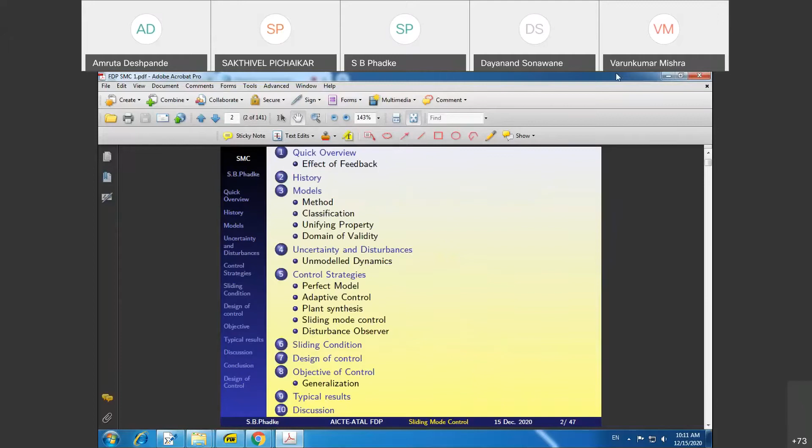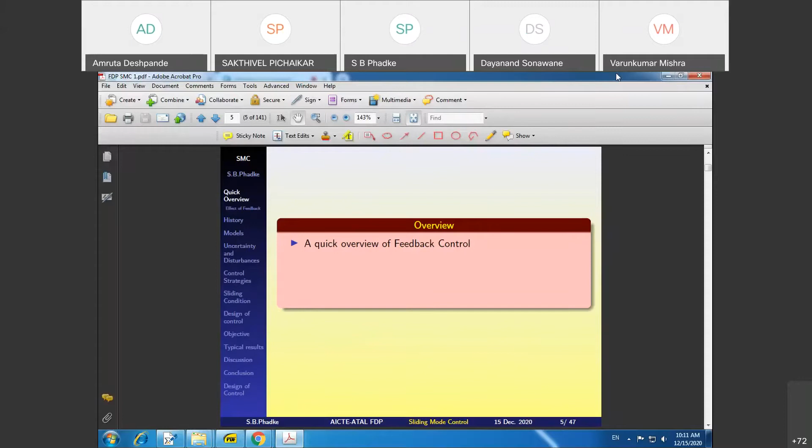Very good, audible. I'll be talking on sliding mode control. And before we go over to sliding mode control, a quick overview of basic ideas in control is what I will start with.

Whenever we talk about feedback control or systems, modeling issues come into picture, along with modeling and their limitations. Modeling is always imperfect, and therefore what limitations are there for modeling, that also we'll discuss.

I'm getting an echo. That might be somewhat nagging to others as well. A big echo is coming. Is it okay with everyone? Hello, request to all participants to please mute your mic.

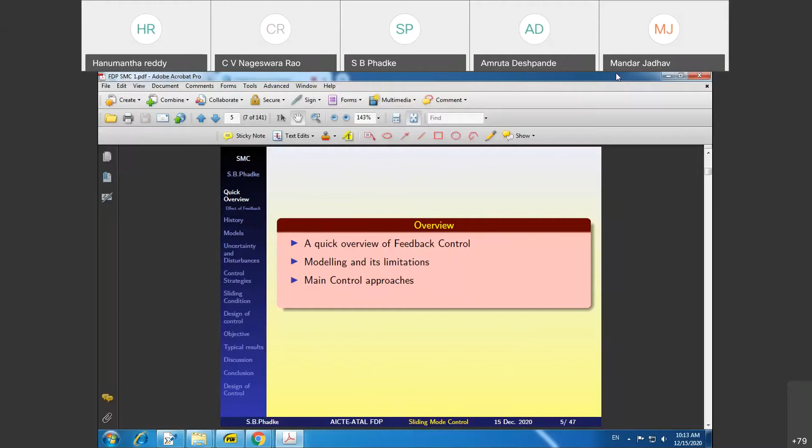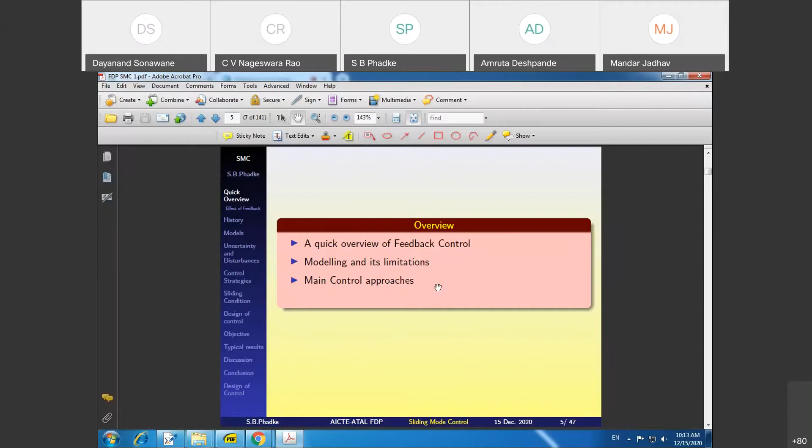So the main control approaches we would like to briefly touch upon and then come over to sliding mode control. Although most of you have already done feedback control and these things are not new to you, I would like to give a basic idea for those who may be altogether new to feedback control, and that also develops a continuity for the discussion.

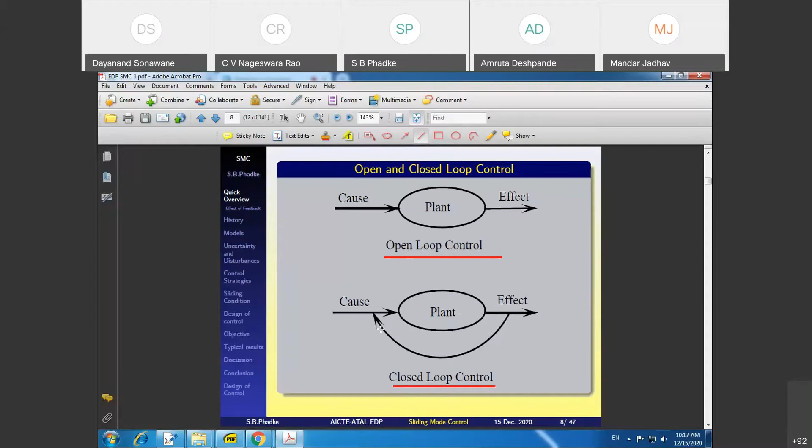So in the first system, the effect depends on cause, but in the second system, cause and effect are interdependent. So that's the idea of closed loop control - cause and effect are interdependent. And this situation can be viewed slightly differently in this way.

A closed loop system, where a cause produces an effect and that effect in turn can alter the cause, is equivalent to two systems - we can look at them in either way. Feedback modifies the cause, as we can see here, because of the feedback from the effect it modifies the cause, acts on the same plant, and produces a desired effect. On the other hand, one can look at the whole thing as feedback modifying the plant rather than modifying the cause. As we see, when we take proportional derivative feedback, the plant itself is modified in a certain sense. So it's a matter of choice, a choice between how you look at the feedback control system. Either way, one can take a look at the feedback property.

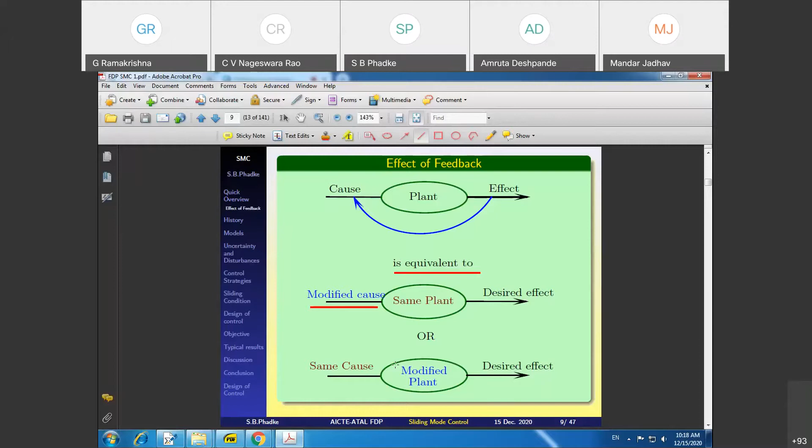The feedback essentially gives us freedom from having to know a lot about the system that we want to control.

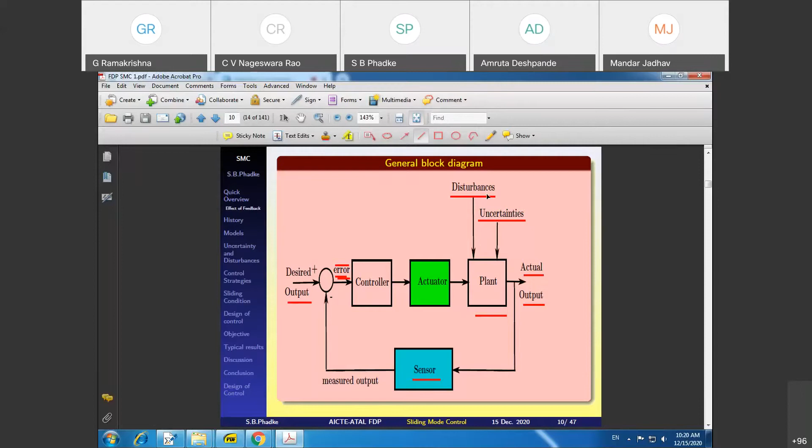Now, this would all have been very simple had it not been for these two players - a disturbance, or disturbances, which are unknown, external, and unmeasurable - we cannot measure them. And uncertainties, that is our ignorance about the plant dynamics, plant's mathematical or otherwise whatever description it has. So it is our ignorance about the plant that is represented by uncertainties. And these two players make the job of feedback control difficult.

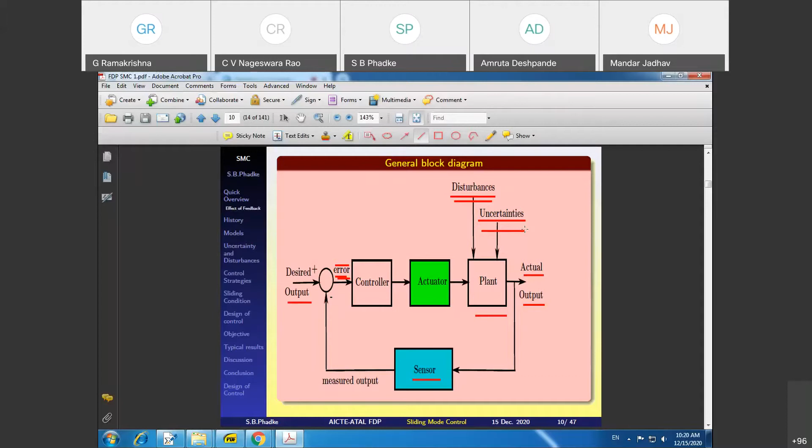The basic classical feedback does make the plant relatively less sensitive to disturbances and uncertainties. But depending upon the plant and its application, that may not be enough. And that is why we'll be considering some control strategies, particularly sliding mode control.

Whatever we discussed just now can be considered to be an interplay between modeling, which represents whatever we know - whatever we know is put in terms of a model. What we do not know is called the uncertainty. Uncertainty may be large, it may be small, or whatever. By uncertainty, I also include disturbances in this - so this is actually uncertainty plus disturbances. And what we have in our hand, that is called the control. There is an interplay between control and modeling and uncertainty, and control and uncertainty.

It might look odd as to how control can change modeling, but depending upon certain control actions that we intend to take, the model may be enough, adequate, or not adequate. A simple example, which we all know, is if we take a large control action, then the actuator may saturate. And in our model of the actuator, if we have not considered its saturation, that model does not remain adequate. So there is an interplay between control, modeling, and uncertainty in a feedback control system.

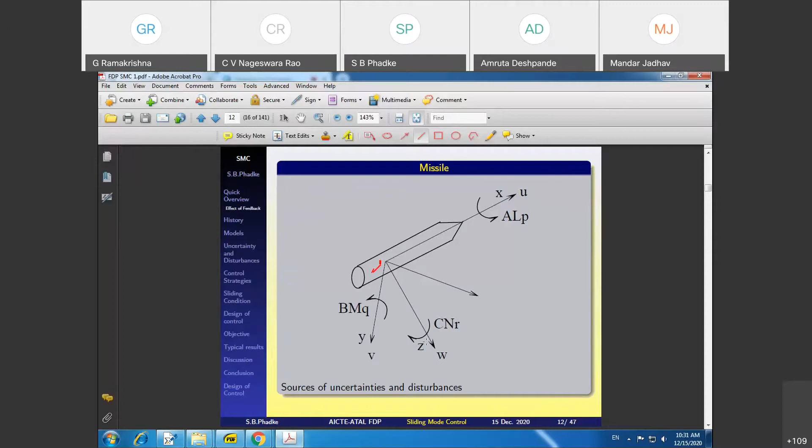There can be control surfaces on the missile which are moved, and they cause a change in the acceleration of the missile. So we have got control in our hand. Uncertainties and disturbances are something that we do not have any control over. By writing the equations of the missile, the suspension system, or this engagement geometry, we try to get a model as accurate as possible, but never really accurate enough. So that's how it is.

A bit of history about how people developed control algorithms or control laws in the beginning. As we all know, the steam engine governor, first invented by James Watt, was one of the earliest applications of feedback. Some applications before that were also reported, but we'll not go into that. So, steam engine governor was first proposed by James Watt in 1788. The basic principle was so good that even in today's steam engine governors, we find some ideas of this early steam engine governor.

Now, when the steam engine governor was invented by James Watt, he did it absolutely by intuition. That means he did not use any model at all. So, no question of talking about uncertainties in the model. The steam engine governor produced by Watt worked fantastically in the beginning, and people were very happy until sometime later when the governor developed unstable operating conditions under some environments. People were thinking as to why the governor is becoming unstable, but could not find any reason by just the physical analysis of the system.

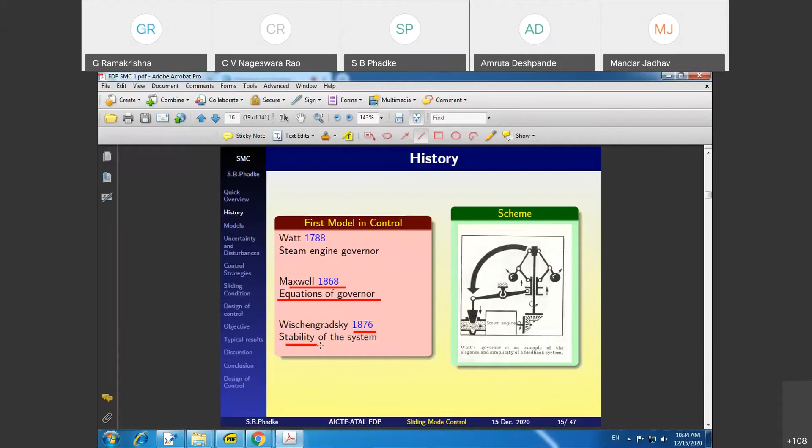That's okay. This situation continued for quite some time, as we'll talk about that later. But the modeling, which is of very great importance to us because we start with model based control and we land up with the difficulty that models are having error, models are not accurate, and therefore what control strategy.

Hello, any question? Does anyone have a question? I'm not getting that question. Maybe sir, it's a noise. Okay. Right. Sir, I am unable to mute that person. Okay, now.

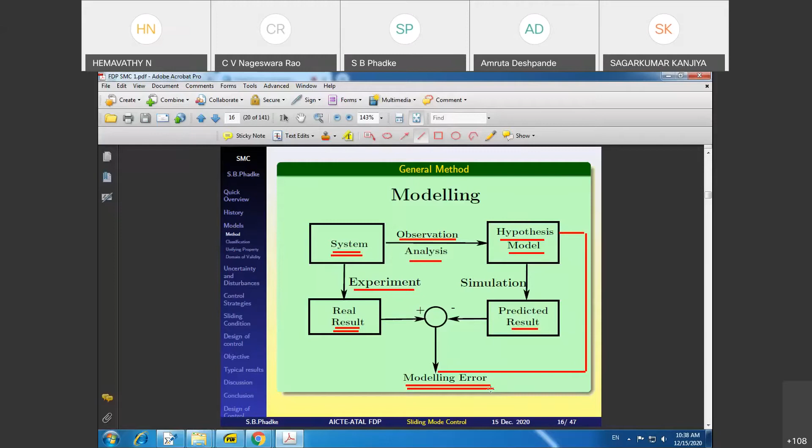The models that have been developed can be classified as analogy models, and many examples are already known to us. The scripts of Chinese and Japanese, which are pictographs, where what we intend looks similar to the script for it. Sun might look like a sun, a moon might look like moon or mountain, etc.

More useful models which have the analogy principle are the scaled down models of ships, aircrafts, dams, riverbeds. CWPRS that we have in Pune, close to Khadakwasla, does some such work on riverbeds and dams by building scaled down versions of those real systems. So that is one way.

In fact, I got some examples of that. The Taj Mahal that we see in presentation shops, gift articles, they are actually scaled down versions of the real Taj. So that's an analogy model.

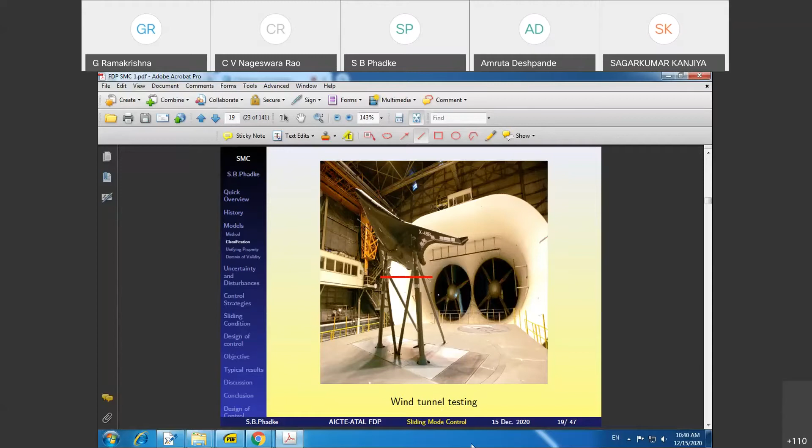A wind tunnel that is used for testing of aircrafts, missiles, and hydrodynamic tanks for testing ships and torpedoes, etc. There are systems like this where the object to be tested, an aircraft, is actually a scaled down version of that aircraft, something like a toy. Instead of flying the real aircraft, what they do is fly air around that object using turbines which produce that air, and a small experiment of that type was done at the Institute of Armament Technology where I was working.

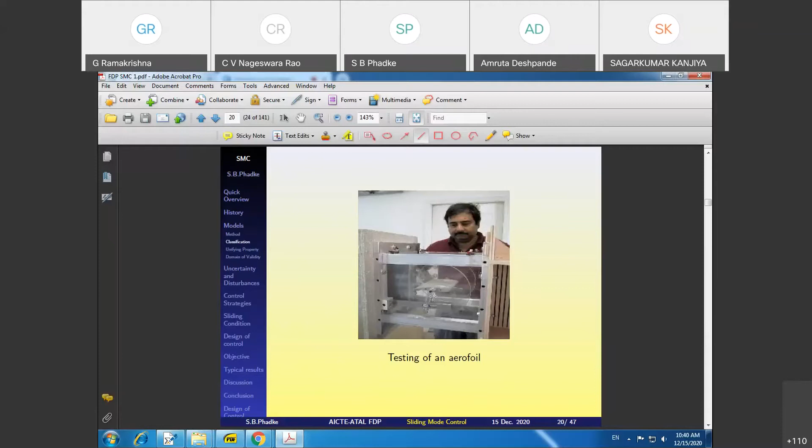Here you see that there is an aerofoil here and the air will be coming from this side. Air is coming from left to right on the screen, and that is how the scaled down airfoil works. The airfoil is actually a control surface on a missile that is being tested. So these are all analogy models that are very useful and are used even today.

But in earlier days, the importance of analogy models was not really understood. In fact, while we were talking about the model of the steam engine governor, somewhere around that, after Maxwell wrote those equations in 1868, in 1875 the British Navy launched a ship called Captain, and it was launched with great fanfare. One British engineer was unhappy.

His name was William Reed, and he had performed experiments with a scaled down version of that ship and concluded that the ship will overturn even in mildly rough seas. Unfortunately, no one paid any attention to what he was saying because his scaled down version of the ship looked like a big toy. They said that he has made experiments with a big toy, nothing else. As ill luck would have it, the ship did sink on its maiden voyage, and some 500 people perished.

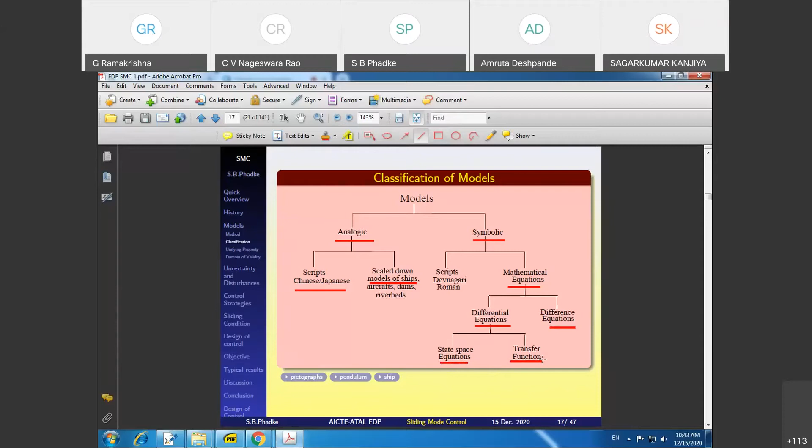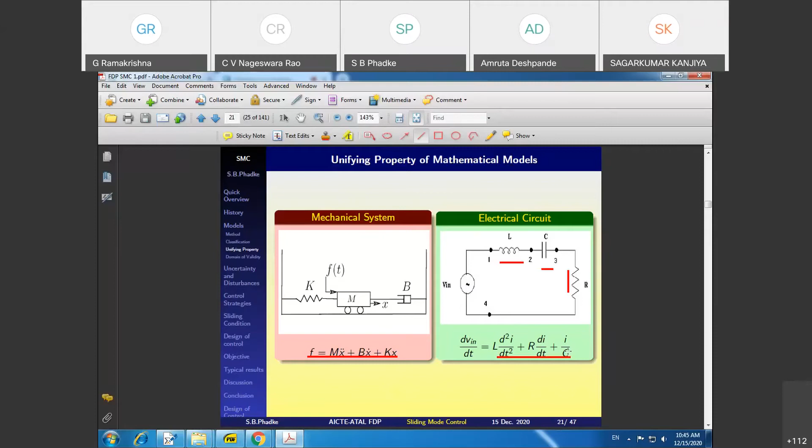But when we write differential equations for these systems, we find that the differential equation that governs a mechanical system like this is a second order differential equation with fairly constant coefficients: mass, damping coefficient, and spring stiffness. The electrical system is also a second order differential equation with inductance, resistance, and capacitance fairly remaining constant for a small duration of operation. So if I can analyze a mathematical model, if I can analyze a second order differential equation, no matter what system I'm dealing with, I'll be able to make conclusions about their performance. So that is why this unifying property of mathematical models is a very important property.

Now, all models have a domain of validity. This is another reason why we talk about being able to control uncertain systems. That means even if I make a model and even if that model is good under certain conditions, the same may not hold good when the operating conditions change. For example, the spring.

We know that the spring force is proportional to the deflection, the Hooke's law for a spring. But if that deflection exceeds a certain value, then that law no longer holds good. Then it is called a hard spring or soft spring.

People in the audience with a mechanical background will agree that if the deflection exceeds a certain value, the linear model will not hold good. So once again, that interplay I'm coming back to: if you have a control law such that the spring deflection is kept within a certain value, then the model kx is good enough. Otherwise, your model needs to be changed.

So there is an interplay between control and model. Similarly, saturation, about which I have already talked, saturation of actuators, amplifiers, and whatnot. We have got saturation in most things. And flexible body effects in aeronautical objects such as missiles or aircraft. A small or short missile, maybe a shoulder fired anti-tank missile, can be considered a rigid body like this. But a long, thin missile will buckle under its own weight, especially in the beginning when the propellant is a very significant percentage of the overall mass, and then flexible body effects will come.

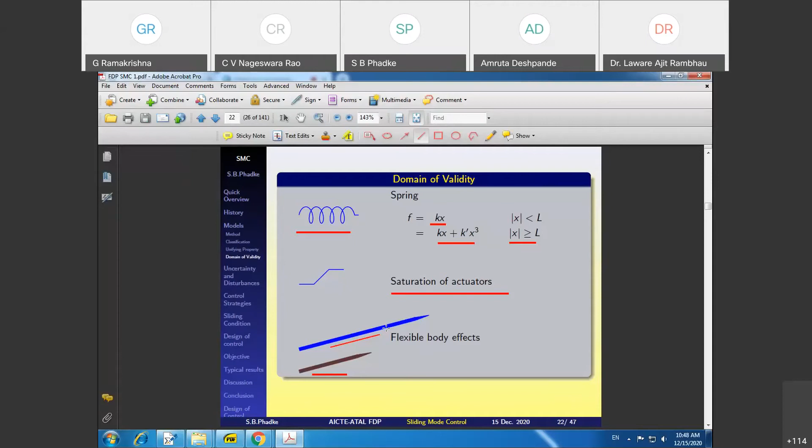Therefore, we formally now talk about the plant, because that is what we are interested in. Control is something we are going to design, and uncertainties and disturbances are the adversaries against which we design our control. So uncertainties in terms of parameter variations, unmeasurable disturbances, unmodeled dynamics. Sometimes dynamics are so fast we don't care to model them at all, an amplifier for example, which is also governed by a first order differential equation, but is so fast we ignore its transfer function. That differential equation can become important if you are ambitious in your control, so once again, the interplay between control and modeling.

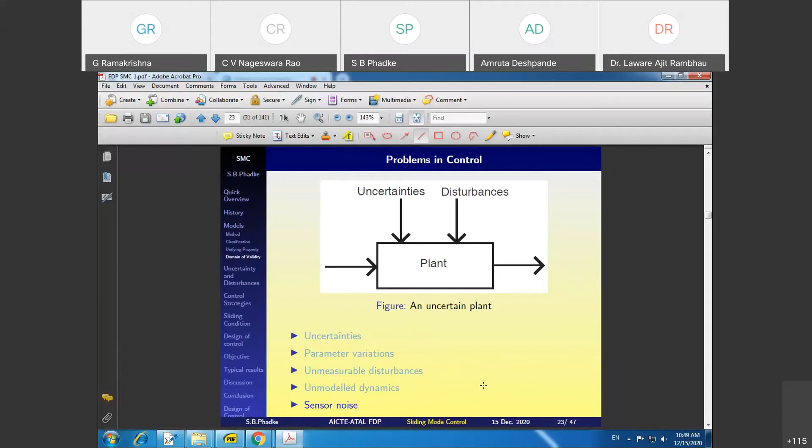Unmodeled dynamics, sensor noise, a hard question for the feedback control engineer, because he depends on what the sensor tells him about the status of the system. If the sensor does not give correct information, he is at a great loss. Sensor data is like the state that is known or observed by the system, and if that gets corrupted, your chances of controlling the system well will be rather difficult.

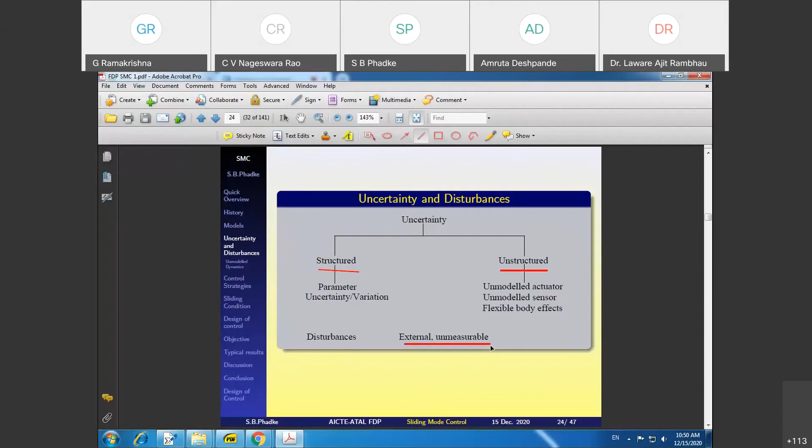So uncertainties are classified as structured, where you have parameter variations etc. but no additional dynamics, and unstructured, meaning some additional dynamics was ignored, like an unmodeled actuator, unmodeled sensor, or flexible body effects, as we discussed with the long thin missile. The disturbances are external and unmeasurable. These are the adversaries against which we design our control law.

Just to give an analogy to unmodeled dynamics: it is dynamics that really exists but was ignored by the designer, and this ignoring is okay provided you don't excite it. This comes up with fast actuators and sensors, and the prudent action is not to excite that fast dynamics. By analogy, I've put a sleeping dog here, as the proverb goes, let sleeping dogs lie, don't wake them up. Similarly, unmodeled dynamics is of that type.

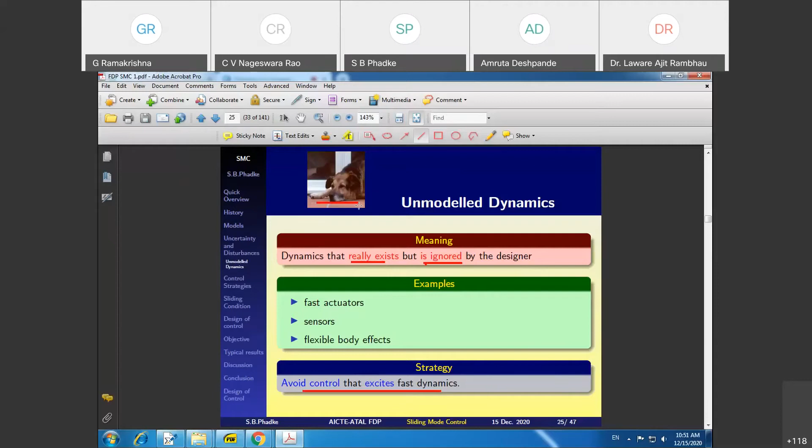The control strategies that are prevalent, very common: the linear quadratic regulator, where the strategy works fine, excellent results, beautiful solutions, but for plants with no uncertainty. That discourages us from using it in the absence of any robust technique. LQR is an elegant solution, but for practical systems it is not very well suited. This was analyzed for use in missiles in a very famous paper in 1984, which showed that modern control, applied without thought about practical aspects, might fail in practice.

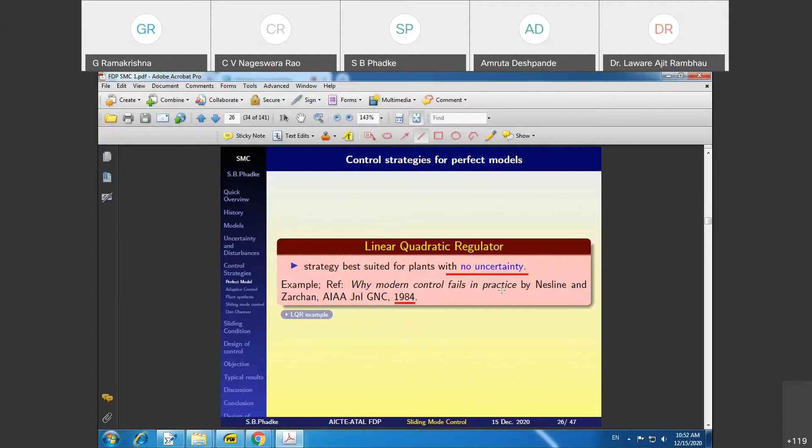Adaptive control is a strategy to estimate uncertain parameters online, but it demands a model and must not have unstructured uncertainties, that is, unmodeled dynamics. It is highly sensitive to unmodeled dynamics.

Adaptive control was developed in the 1970s, and a lot of work was done. One person showed that adaptive control algorithms can become unstable in the presence of unmodeled dynamics. This gave a big jolt to the adaptive control community, and they developed laws where adaptive control can work in the presence of unmodeled dynamics. But still some problems remain, so adaptive control must be used with caution.

Some strategies sort of virtually alter the plant.

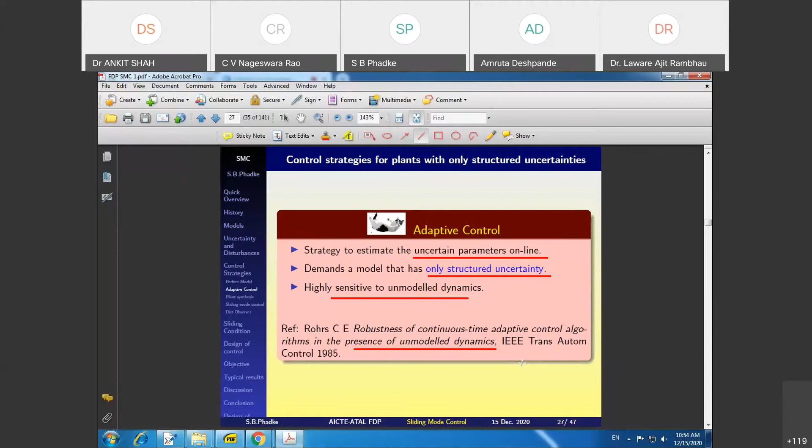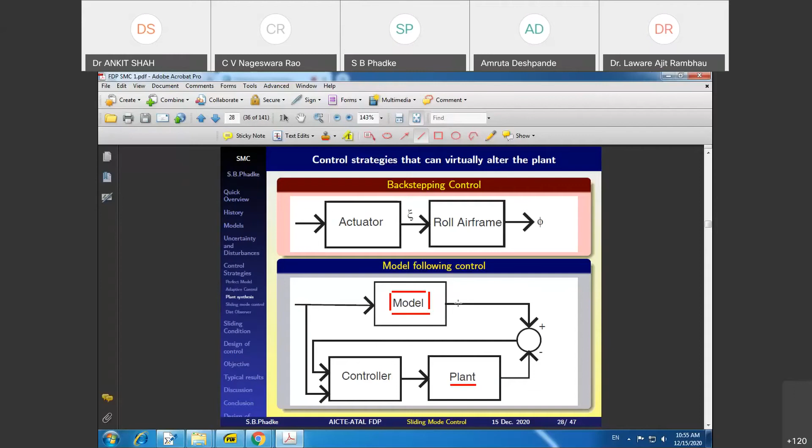Model following strategies are used and are popular even today. Sliding mode control, which we will discuss in greater detail, only requires bounds of uncertainty. In this case, control is discontinuous - not smooth - and that is a big drawback. A discontinuous control can excite fast unmodeled dynamics and make the system unstable. So one thing leads to another, and smoothing approximation to overcome this drawback is required. We'll talk about these issues in greater detail later.

The main advantage of sliding mode control is that it requires only the bounds of uncertainty. That's a great advance compared to strategies developed earlier using lead-lag networks or PID control. Compared to those, this represented a greater advance.

Sir, regarding the bounds of uncertainty - lower bound and upper bound - in one ISA transaction paper, I have specified the lower and upper bounds for the controller parameters. But there must be a systematic procedure to specify these bounds. On what basis? Because we don't know the upper bounds for the controller parameter or plant parameter. Is there any way to decide the lower and upper bounds, or which methods are used to specify the bounds?

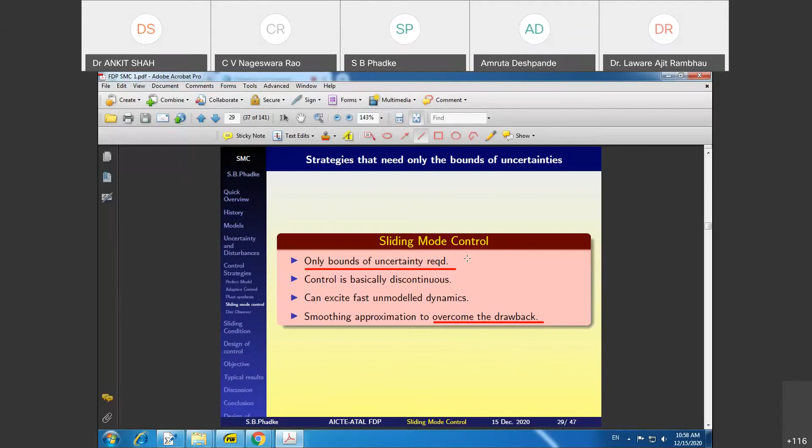Apart from sliding mode control and the methods discussed so far, there are other methods like fuzzy control and neural networks, where the model itself is not assumed. These are becoming popular, although fuzzy control has difficulties with stability proofs. This takes us back to the era of James Watt, who designed systems without a model. Sometimes things go back and forth, which is quite interesting. Unfortunately, we will not be talking about fuzzy control here.

The next topic is the disturbance observer, where rather than talking about the bounds of uncertainties, we estimate the uncertainty itself. The basic principle is to estimate the uncertainties and use that estimate in control so as to negate, to annul, the effect of the uncertainties.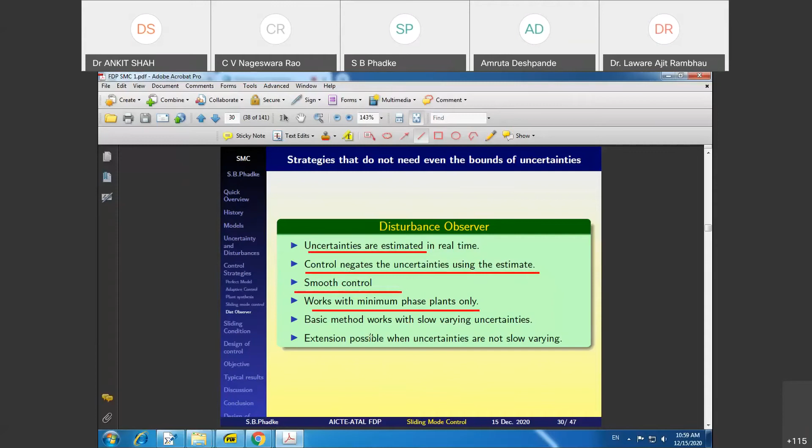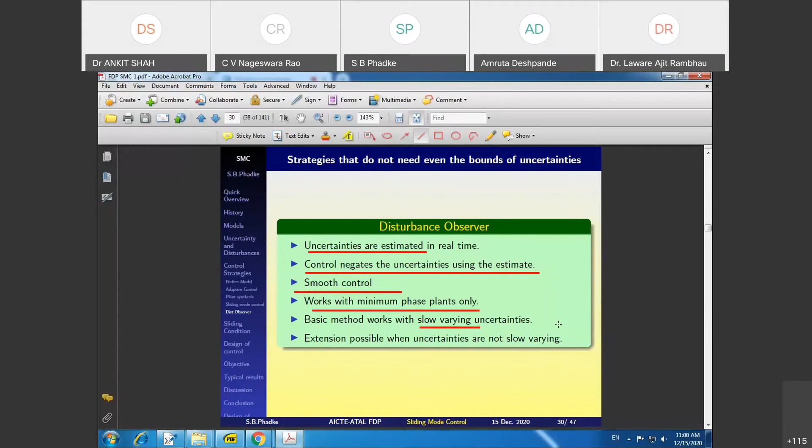The control is smooth and works with minimum phase systems, which have no right half plane poles or zeros. The basic method has a drawback of working only with slowly varying uncertainties, but extension is possible for faster uncertainties. A combination of disturbance observer and sliding mode control shows great promise. I suppose in the next lecture Dr. Amruta Deshpande will talk about applications of disturbance observer to MPPT and other fields. Disturbance observer together with sliding mode control is a very promising area.

Now we come to sliding mode control.

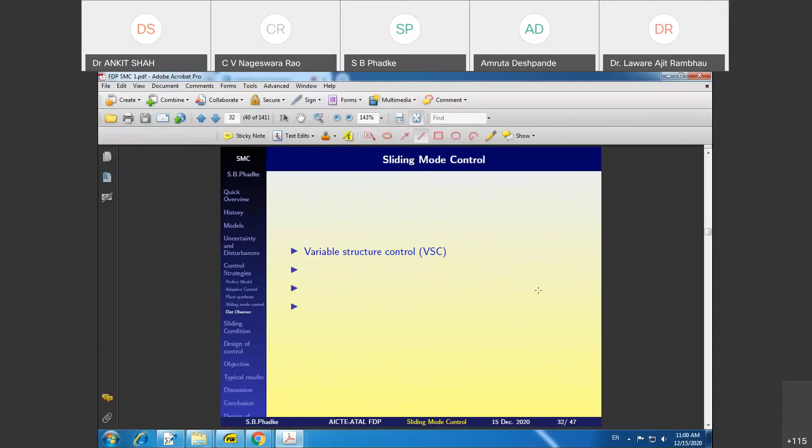The sliding mode control was originally called a variable structure control because some feedback connections get changed. Some feedback goes from positive to negative, or some gains change during operation automatically. These systems are called variable structure control systems.

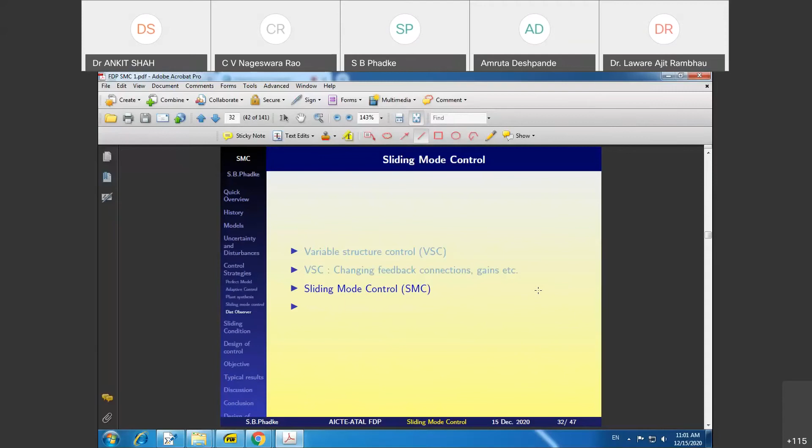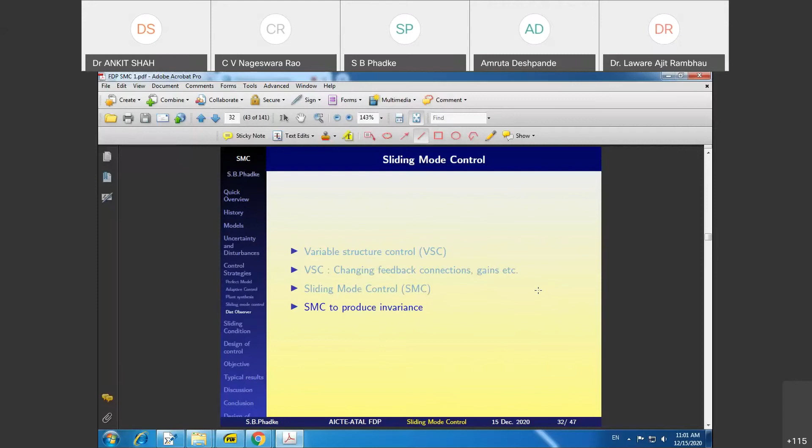But variable structure control systems do not give us freedom from the uncertainties. They have some favorable properties, but sliding mode control is something that guarantees invariance. That means with sliding mode control, you can say that the performance of the given system will be such and such in spite of the presence of uncertainties. So that's the beauty of sliding mode control.

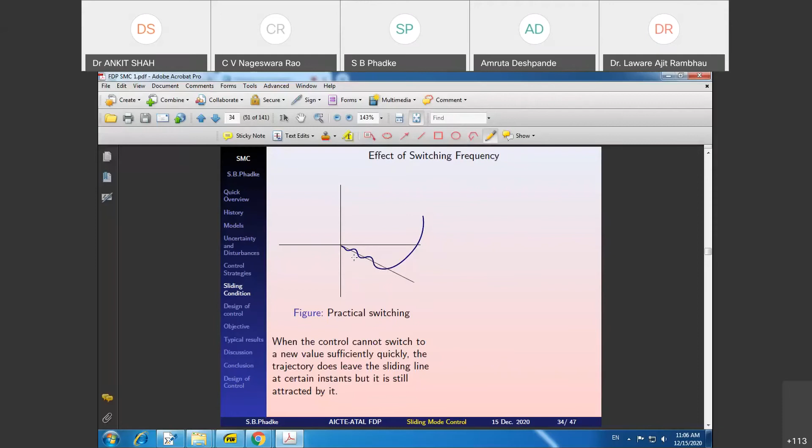But it is still very close to the sigma line, and therefore a modest invariance is obtained.

So when the trajectory leaves the sliding line, it is mildly dependent on system parameters. On the other hand, if the switching is ideal, a trajectory starting from P goes to Q, hitting the sigma line, and after that it goes along QO, remaining on the sigma line.

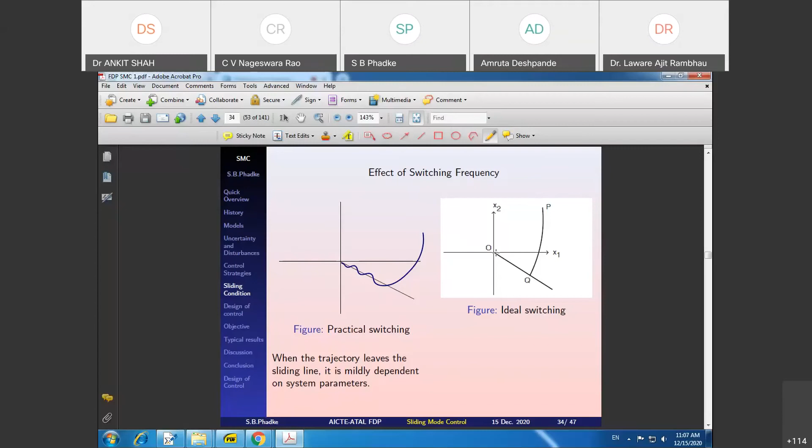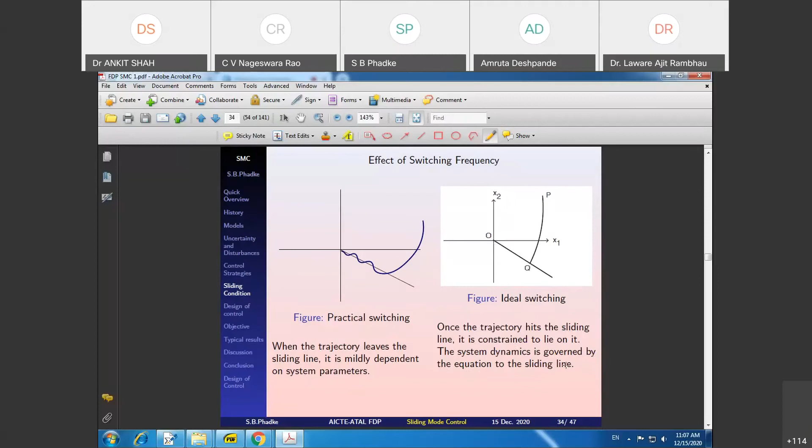So in such a situation, once the trajectory hits the sliding line, it is constrained to lie on it, meaning it is constrained to lie along QO. The system dynamics is governed by the equation of the sliding line, whatever that equation is. In such a situation, the system is totally insensitive to system parameters.

Excuse me sir, can you kindly tell me how to choose this sigma line? What is sigma? Is it the real part of the pole, or something else? No, sigma is just the name given to this line. This line QO is a line going through the origin, and it can be written as C1x1 plus x2. But sir, how to choose that particular line? Yeah, we'll talk about it.

I think I'll have an answer in my presentation. If it is not there, I'll answer your question later.

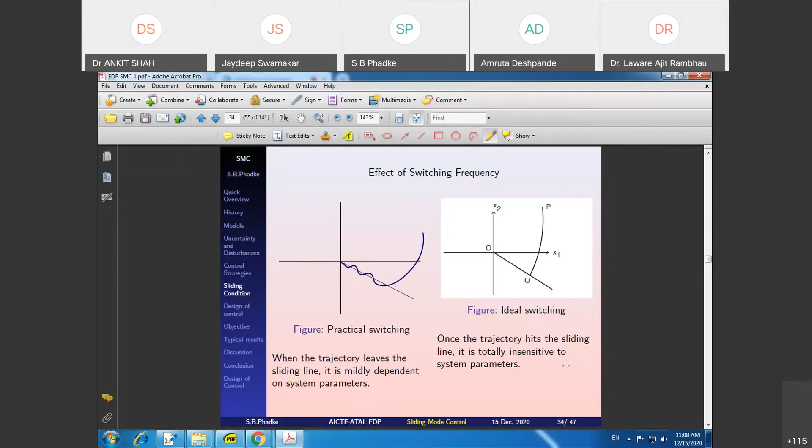So let us take an example. I'm taking a simple example and we are working through it so that you will be able to design a sliding mode control for a second order system at least, and later for higher order systems. We are going through the steps of design so that there is no mystery in sliding mode control.

Let us see the description. I have a second order system: x1 dot equal to x2, x2 dot equal to minus a1 x1 minus a2 x2 plus bu, and the parameters a1, a2, and b are uncertain.

Uncertain, but I know the range in which these parameters lie. I have got some knowledge of these parameters. They are not totally unknown to me.

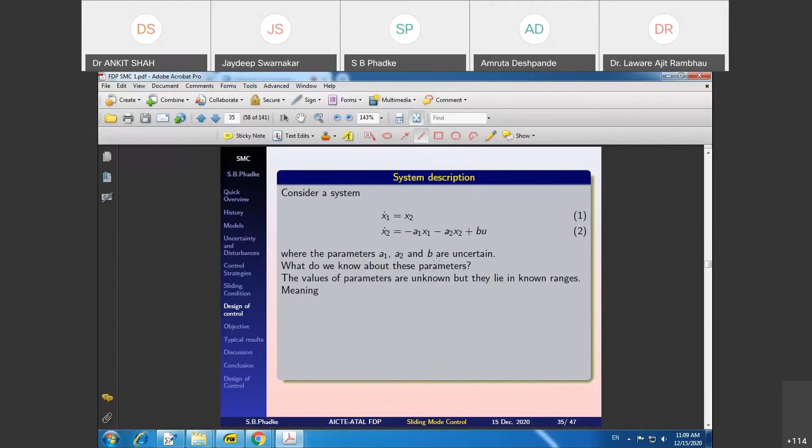The values of the parameters are unknown, but they lie in known ranges, meaning parameter a1 is known to lie between a1 under bar and a1 over bar, both known to me. Suppose you have a resistance, you generally know its value may be between 80 ohms to 120 ohms. We don't know the exact value, but we know it lies in a certain range. So this crude knowledge about the system parameters is generally with us.

Later on, we'll overcome this difficulty also. Even if we don't know anything about the parameters, can we still control? Yes, but that will come later.

Similarly for A2, I know the lower bound and upper bound in which this parameter lies, and the same goes for B. I know the range in which B lies. So that's my knowledge: the parameters are uncertain, I don't know their exact values, but I do know the range in which they lie.

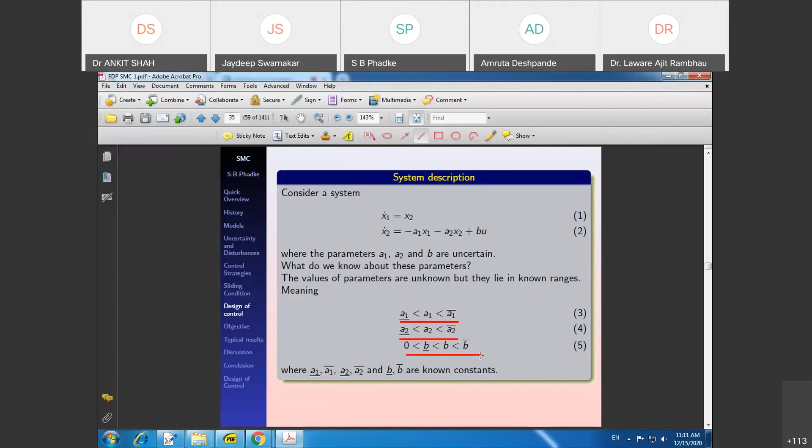Now, what is the objective of control? Design a control so that the system trajectory starting from anywhere in the x1, x2 plane will hit the sigma line and will then slide along it. So we define a sliding line.

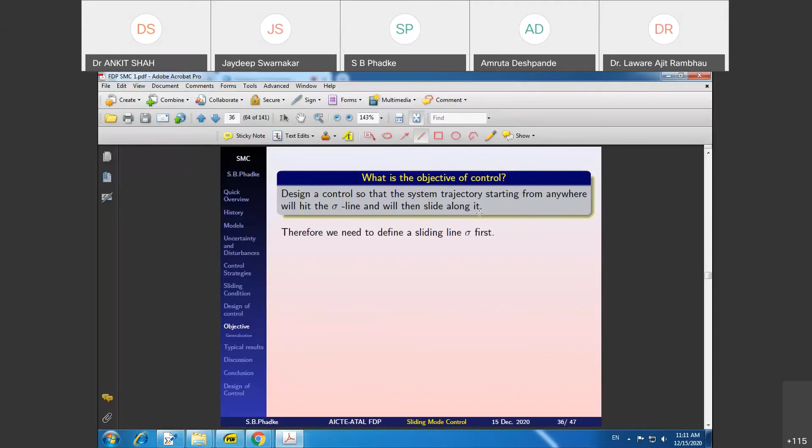This sliding line is defined as C1 x1 plus x2, where C1 greater than 0 is a user chosen constant, something that I have chosen. As far as the system parameters A1, A2, and B are concerned, I have not chosen them and I don't know what their exact values are.

Is that okay? Please feel free to stop me and ask your questions, because if you understand the basic design of sliding mode control, the purpose of this lecture will be more than served. So don't hesitate to ask your questions.

Next, for sliding to occur, control must be designed so that the sliding condition is satisfied, that is, sigma sigma dot must be made less than 0. We'll see exactly how we can do it.

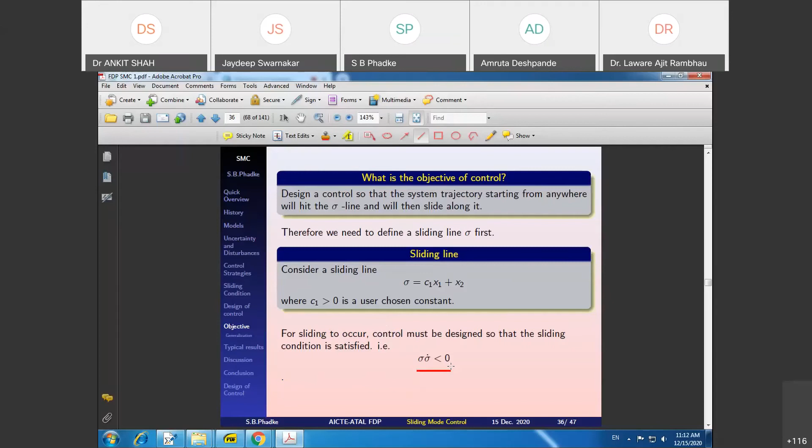Just for reference, let's repeat: this is our system, where A1, A2, and B are unknown parameters to us, uncertain, but we know the ranges. This sigma is what I have chosen, with C1 as my choice. Our friend has asked how to choose this line; we'll talk about it a little later. The way to bring the trajectory of the system onto the sigma line is to design a control so that sigma sigma dot is less than 0.

So the first step will be to get sigma dot, and by the equations in front of you, it's straightforward and easy. If you concentrate, you will understand all the equations that we are going to write in the next 10 minutes.

So sigma dot equals C1 times x1 plus x2 dot. Next, just substitute the values. I've given the detailed workout, so even if there's some gap in the lecture now, later when you read these notes, you'll be able to get everything. All equations are written down here.

I'm not skipping any. Now consider a general form of U. I have to design a U so that sigma dot will be less than 0. That's my objective. So how will I design U? What do I have in my hands? I have only the sensors, the measurements given by the sensors, and the sensors will measure the states, that is x1 and x2. I will use x1 and x2 to design the control, and a general form of U will be U equal to psi1 x1 plus psi2 x2, where psi1 and psi2 are gains, something like amplifier gains or feedback gains, state feedback for people familiar with state feedback control.

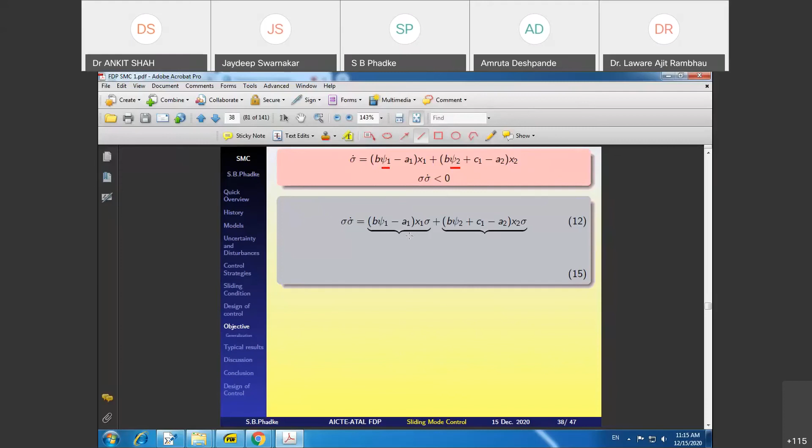I want to make sigma sigma dot less than 0 by using control, that is by designing psi1 and psi2. Obviously, if each of these terms, put under braces, is negative, certainly sigma sigma dot will be less than 0. I'll make life simpler by calling those terms y1 and y2. y1 is the first term, y2 is the second term. For satisfying the sliding condition, sigma sigma dot must be made negative, and therefore I'll try to make both y1 and y2 independently negative. That may be overkill, but it's a simpler procedure.

So consider y1. For y1 to be less than 0, you can see equation 14: the right hand side of equation 14 must be less than 0. Now, when x1 sigma is greater than 0, y1 will be less than 0 if b psi1 minus a1 is less than 0, that is, psi1 should be less than a1 by b. Straightforward—just put a1 on the other side and get this condition. When x1 sigma is less than 0, y1 still has to be made less than 0, and that will happen if b psi1 minus a1 is greater than 0, that is, psi1 greater than a1 by b.

We have a funny condition here. If I want to make y1 negative when x1 sigma is greater than 0, I have to make psi1 less than a1 by b, and otherwise, I have to make psi1 greater than a1 by b. So obviously, a constant value of psi1 will not work. So how to choose psi1? A fixed value is not going to work.

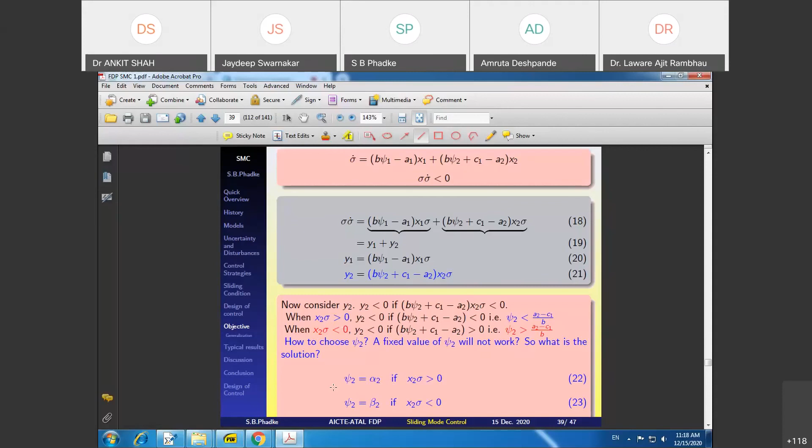So again, for psi2, I cannot use a single value, and I have to switch psi2 depending upon the sign of x2 sigma. Then I'll be able to satisfy it. That is also shown here, worked out.

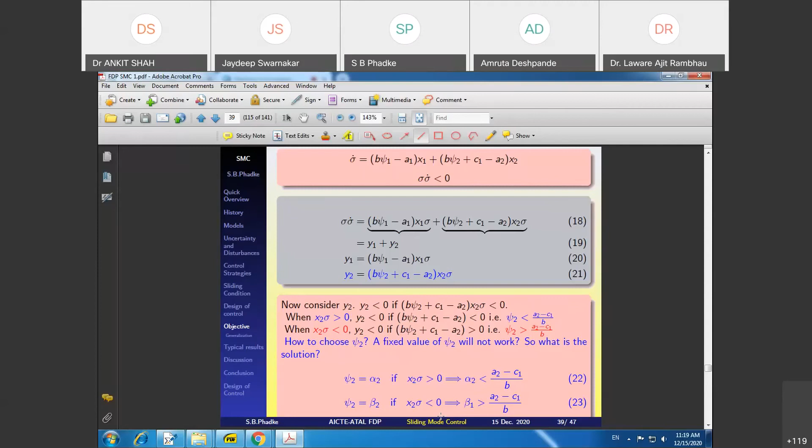So having chosen psi1, psi2, that is alpha1, alpha2, beta1, beta2, depending upon the sign of x2 sigma, I am able to make sigma sigma dot less than 0. If sigma sigma dot is less than 0, sigma goes to 0. And then the system behaves like the user chosen C1 x1 plus x1 dot equal to 0 system. That is how the invariance, insensitivity to the uncertainties happens.

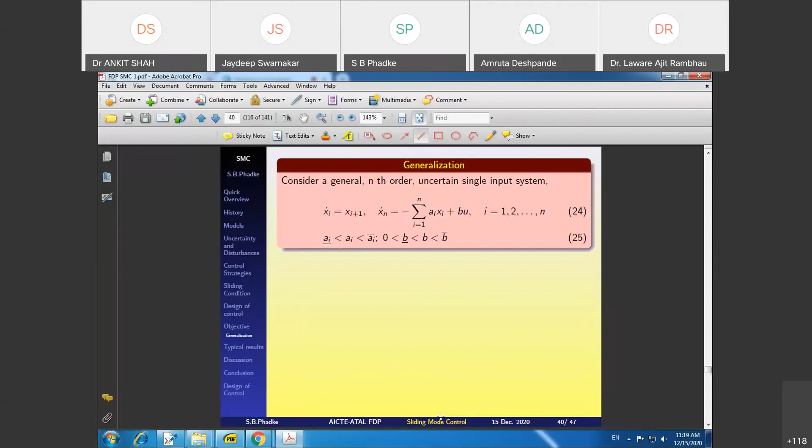A generalization is being discussed next. If I have an nth order system, my sliding surface will have n terms, and the control law will also have n terms that you see here.

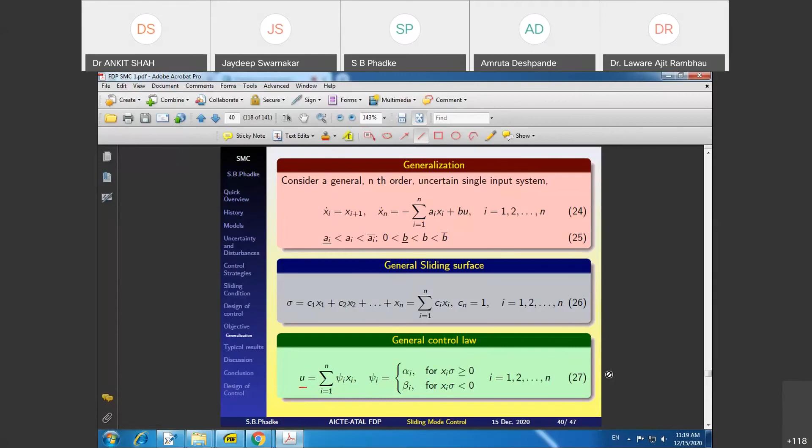There will be switchings between alphas and betas, i going from 1 to n. The generalization tells us that the method we just discussed is tedious when the system is of higher order. So we'll work out a remedy for that. But before that, let's look at what the control we designed produced.

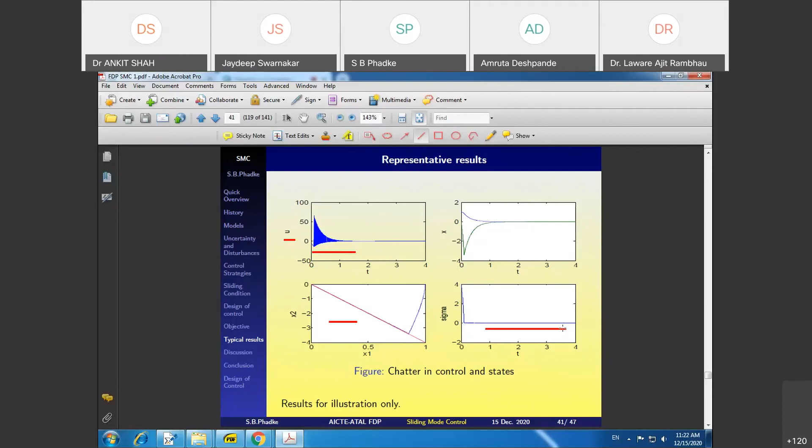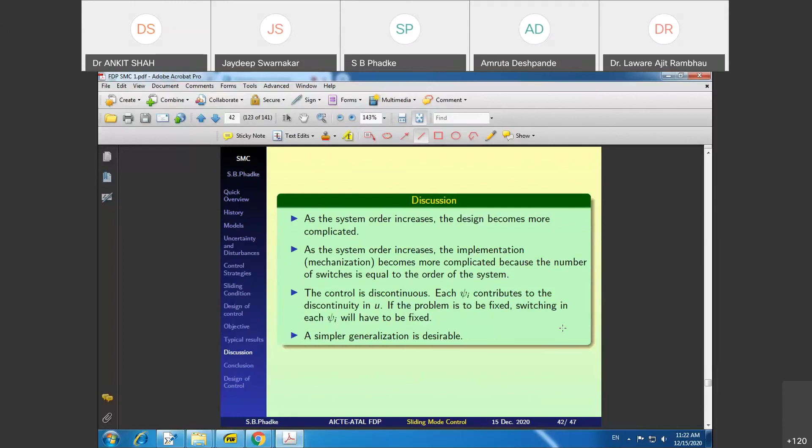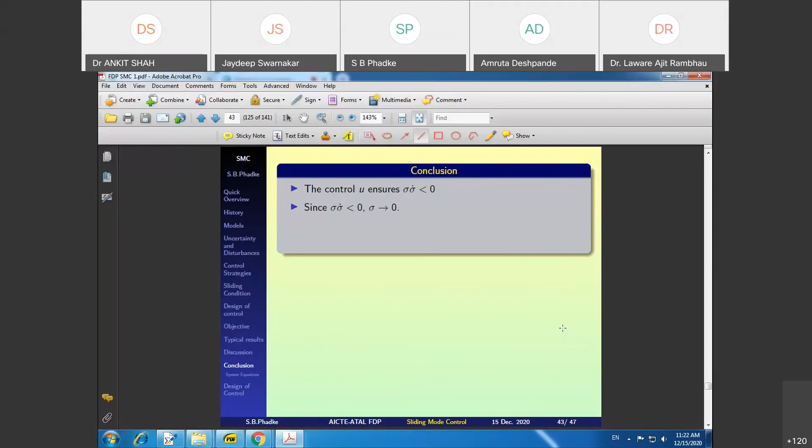The control U ensures sigma sigma dot less than 0. When sigma sigma dot is less than 0, sigma goes to 0. When sigma goes to 0, c1 x1 plus x2 goes to 0. And notice the first equation, x1 dot equal to x2. So using that, c1 x1 plus x1 dot equal to 0. And therefore, if I solve this, x1(t) equal to x1(0) e raised to minus c1 t. Now, our friend had asked how to choose this sigma line.

If I choose a sigma line like this, I'll try to draw it here. Now if I choose a sigma line like this, the value of C1 for this line will be negative. Suppose it is making an angle of 45 degrees, C1 will be equal to minus 1. If I take this sigma line, what will happen to the equation x1(t) equal to x1(0) e raised to minus c1 t? With c1 equal to minus 1, this will become unstable because e raised to t will go on diverging as t progresses. Therefore, I cannot use a sigma line that passes through the first and third quadrant. I must take a sigma line that goes through the second and fourth quadrant like this. That is for sure, for stability.

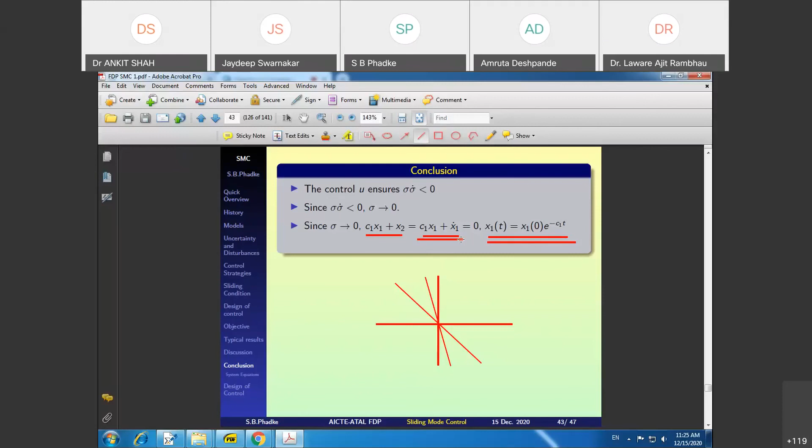Insensitivity to system parameters happens only in sliding mode, not in the reaching phase. During the reaching phase, which we saw earlier, the system is sensitive to system parameters.

So we note some points. The nature of control is discontinuous, and the order of the system is reduced. The original system was second order. When it was in sliding mode, it behaved like a first order system. The order of the system was reduced by 1, which is equal to the number of inputs. The number of structures depends on the number of states.

How to generalize for higher order systems? This form is not good. Actually, the answer to this next question, the fifth question, is that this form is not good. It is a cumbersome form. Can we think of something better?

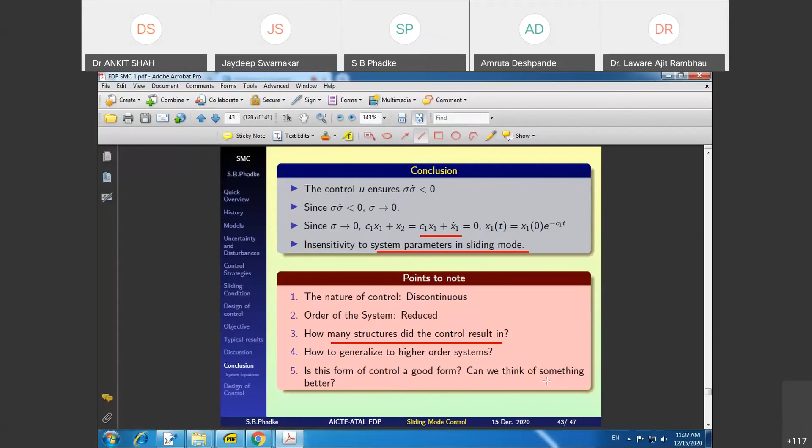Shall we have some more time and finish this part? I think we'll need... what's the time now? I think we still have time, yes, go to the end.

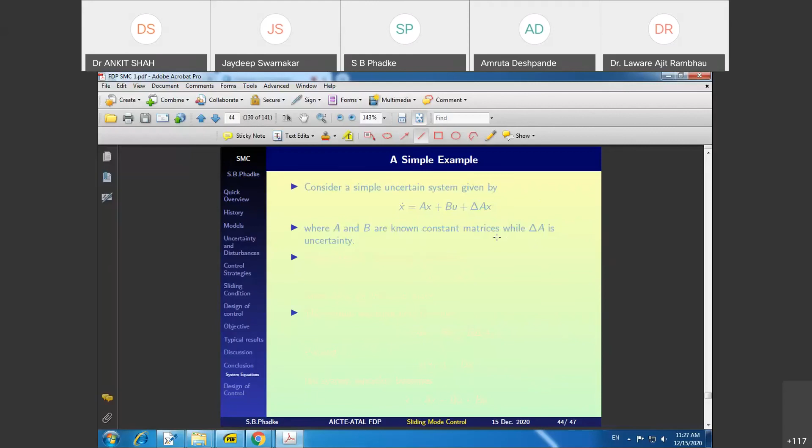So a simple example: I'm considering uncertainty only in A. But of course, we can consider uncertainties in other matrices like the B matrix and also the external disturbance. That is also possible, but just to make life simpler, I'm just considering the uncertainty in A, called delta A, which is the uncertainty. Next, the assumption is that delta A has to have a certain form, and that form is called the matching condition.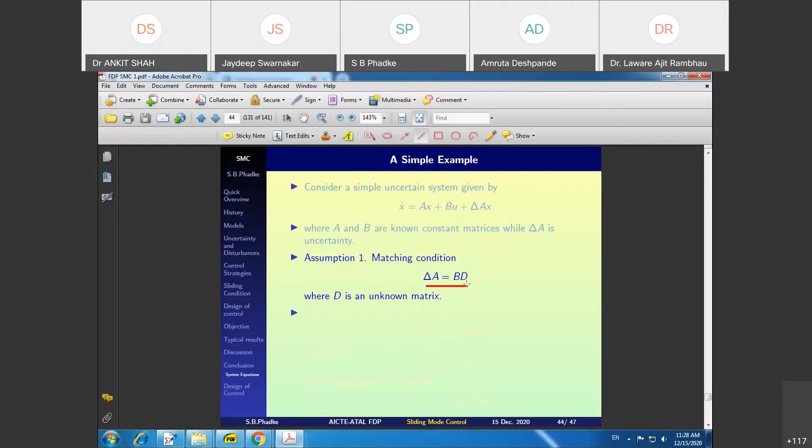This is another thing we have to consider. The uncertainty delta A has to satisfy a condition like this: delta A equals B into D, where D is an unknown matrix. So uncertainty is still present, but a form is assumed.

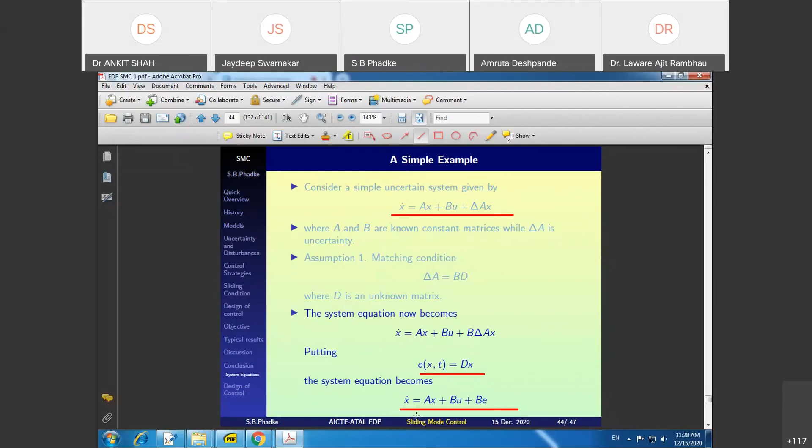The system now becomes, when I put delta A equal to BD and call that dx as the lumped uncertainty, my original system now looks like this: X dot equal to Ax plus Bu plus Be.

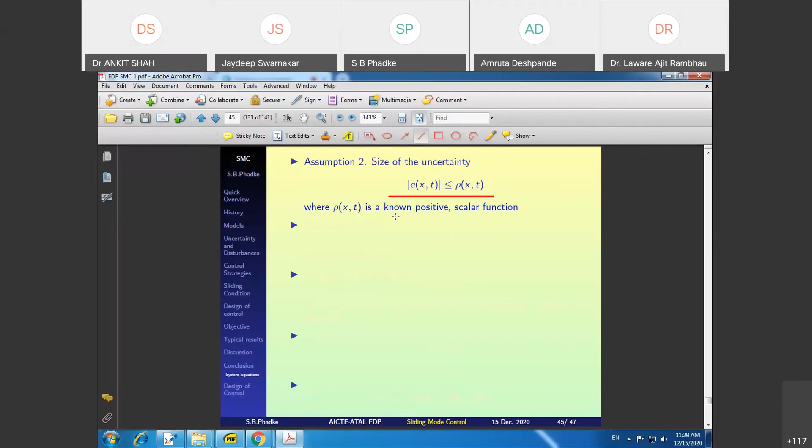I make an assumption. I had earlier assumed that I know the bound of uncertainties. Now the size of uncertainty has a similar assumption, and I'm saying that the uncertainty is bounded by a rho function, where rho is a known positive scalar function.

The switching surface C1x1 plus x2 was the switching line. That can be generalized by putting it as sigma equal to Sx. For our previous example, S would be a row vector C, 1, and x will of course be a column vector x1, x2. Design of control.

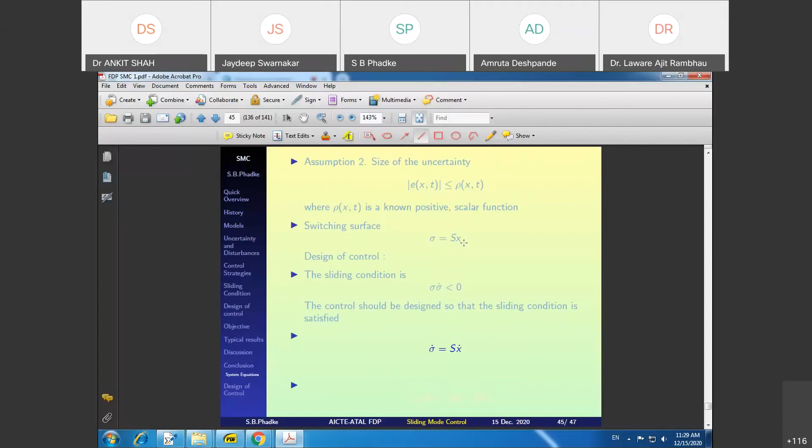The sliding condition is sigma sigma dot less than 0. So the control should be designed so that the sliding condition is satisfied. I get sigma dot equal to S x dot. Substitute the values, straightforward design: S into round brackets, Ax plus Bu plus Be.

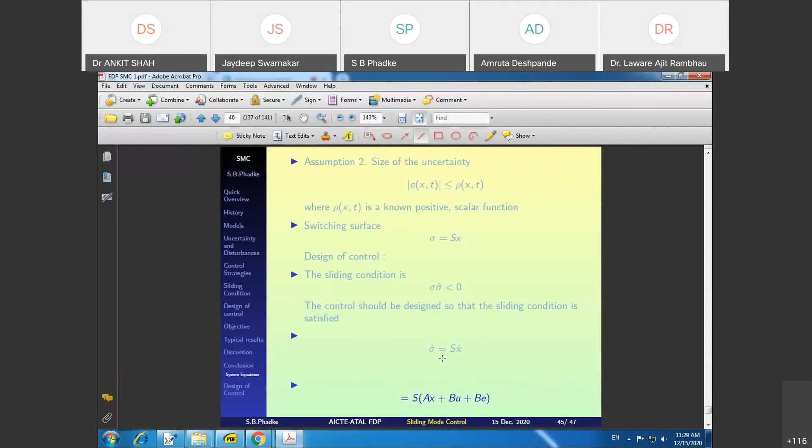I split my control into two parts: one for catering to known things and the other part catering to the unknown things. So now, selecting u equal to u equivalent plus un, and putting it in the sigma dot equation: S Ax plus S Bu equivalent plus SBe. Well, I have made a mistake here, there should be un also. u equivalent is chosen so that SAx plus SBu equivalent goes to 0.

There is one more term here, I'll put it. This SBun plus SBe - SBe is already there, SBun was missing here. So there is a correction, a typo here.

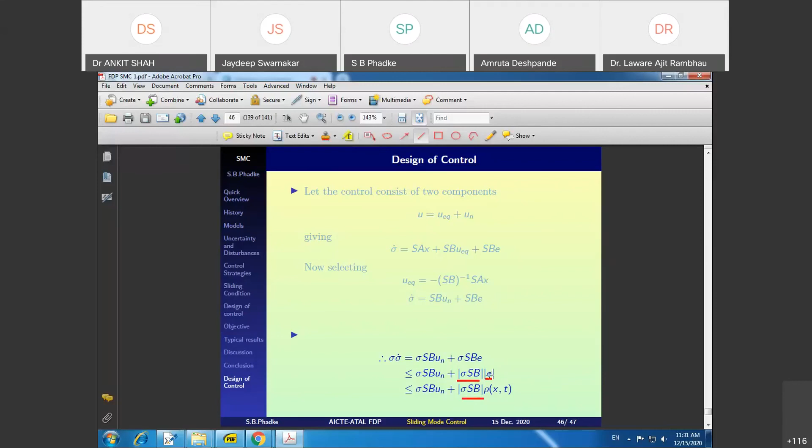Now selecting u equivalent equal to this, by putting it here, I get sigma dot equal to SBun plus SBe. Sigma sigma dot: sigma SBun plus sigma SBe, which is less than or equal to, by using standard inequalities, sigma SBe will be smaller than absolute value of sigma SB into absolute value of e. That is smaller, once again, by absolute value of sigma SB, and mod e we have assumed is smaller than the rho function. So rho.

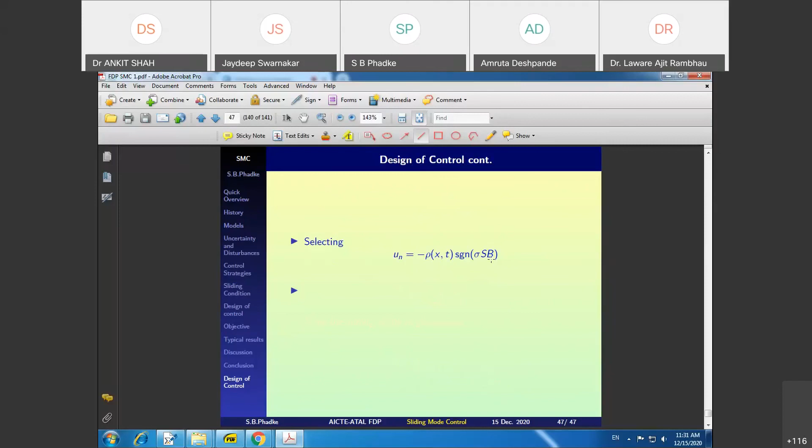Now selecting un as minus rho times signum of sigma SB, I get sigma sigma dot less than 0. Thus, the sliding mode is guaranteed.